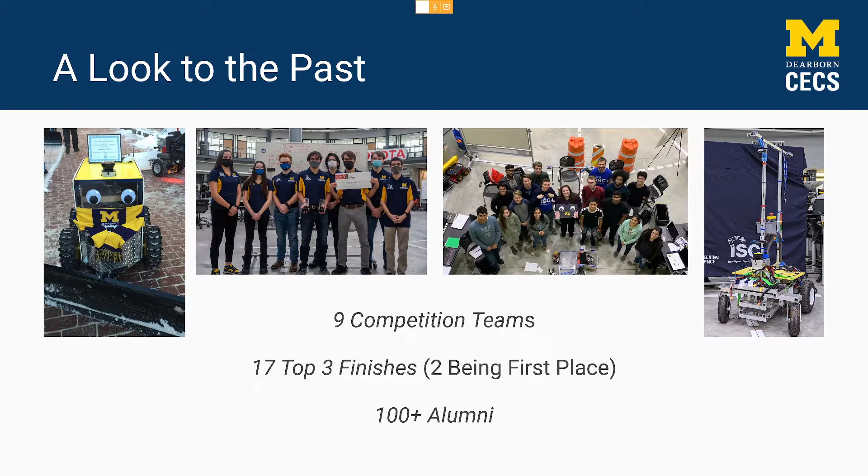First, I want to take a look into the past. One thing that's special about ISC, unlike other teams like formula teams and MASA that are based around a specific competition, is that ISC is more based around an idea - the idea of autonomous vehicles and learning how to control them and navigate various spaces. Since 2002, we have had 9 different competition teams across 4 different competitions, holding 17 top 3 finishes, 2 of which were first place finishes, and over 100 alumni who all came together with the same idea of working in the autonomous vehicle field.

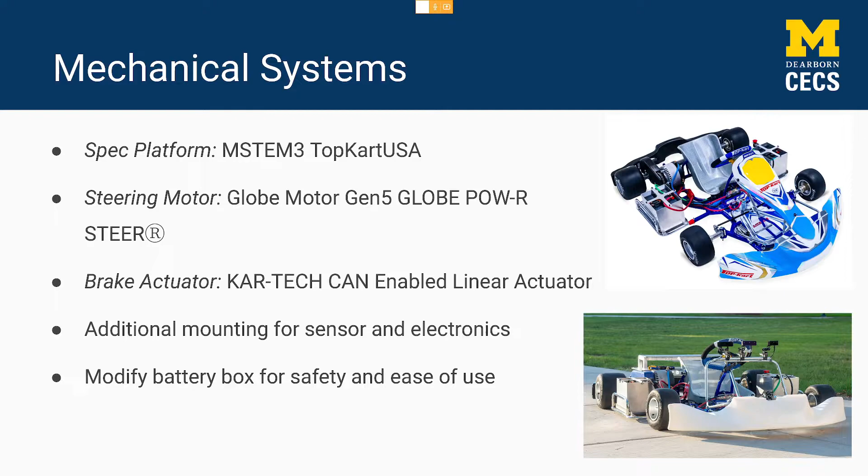Our steering motor is a Globe Motor Gen 5 Globe Power Steer EPAS motor. Our brake actuator is a KAR-TECH CAN-enabled linear actuator. I'll go into a bit about additional mounting for sensors and electronics, as well as some modifications to the battery box for safety and other things.

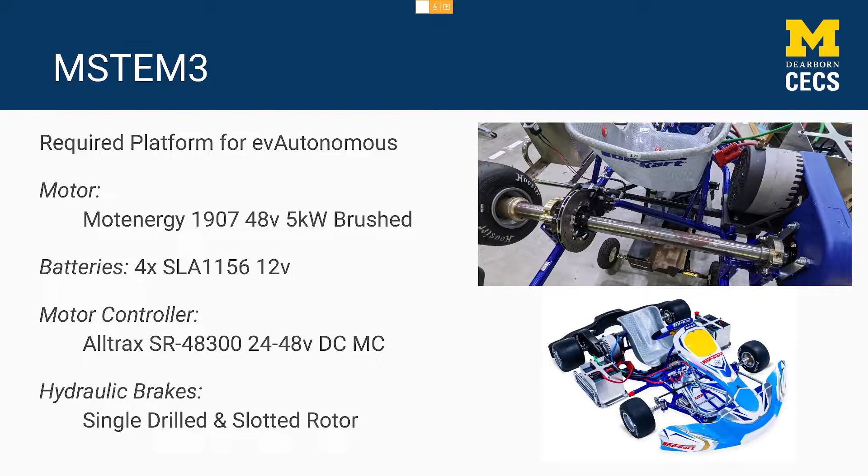So this is the spec cart. The motor is a Motenergy 1907, 48 volt 5 kilowatt brushed motor - all teams get the same. In the future, if we want to upgrade it, we may go to a brushless motor, because right now our cap is around 30 miles per hour for speed. For batteries, we have 4 lead acid 12 volt batteries. Our motor controller is an Alltrax 24 to 48 DC motor controller, and then we have hydraulic brakes.

Some data: it runs optimally from 9 to 16 volts at around 13.5 amps, 50 newton meters of torque, and runs around 525 degrees per second, meaning we could make a full turn without any weight in around a quarter second. It also runs at a 500,000 baud CAN rate.

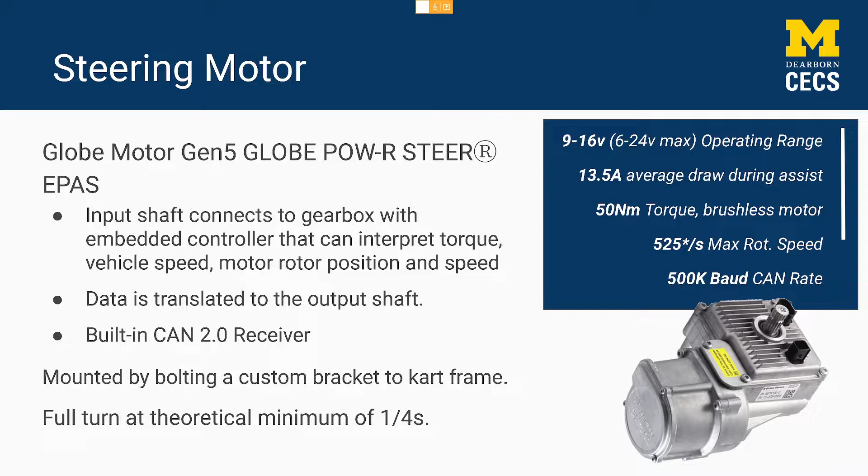For our brake actuator, it has a built-in microprocessor, and this will be mounted near the pivot point of our hydraulic brake arm to do electric braking, which will be trained by the AI. This operates around 250,000 baud rate, a bit lower, but will be controlled by the microcontroller connected to this. It operates from around 10 to 30 volts with 5.8 amps at max draw.

Its max extension is 3.1 inches, and at around 50 pounds load, it can extend around 1.77 inches per second. This means we can have fully locked brakes within around 3/4 of a second, which is pretty fast.

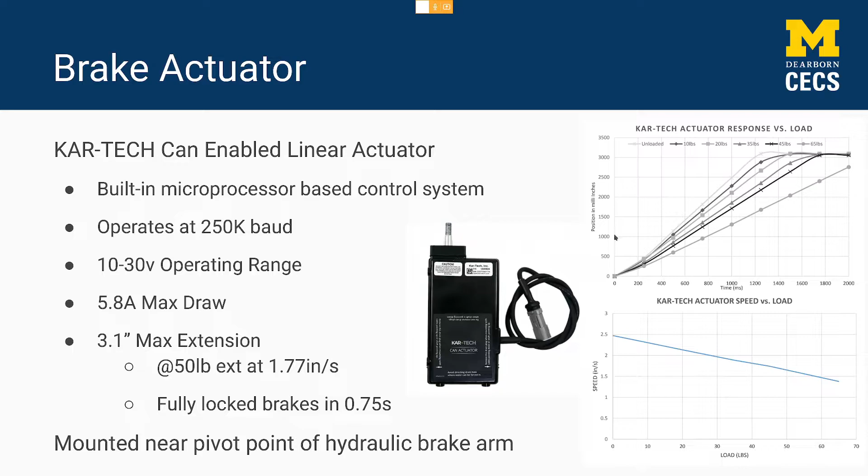Since electrical braking could have failure issues, we also have a mechanical band brake as a hardware-based braking system. This is controlled by an electromagnet, which gives us two options: we can either manually cut the power by using a circuit, or if the entire power circuit loses power, it'll automatically close the brake, which stops the car regardless of whether the computer is working or not.

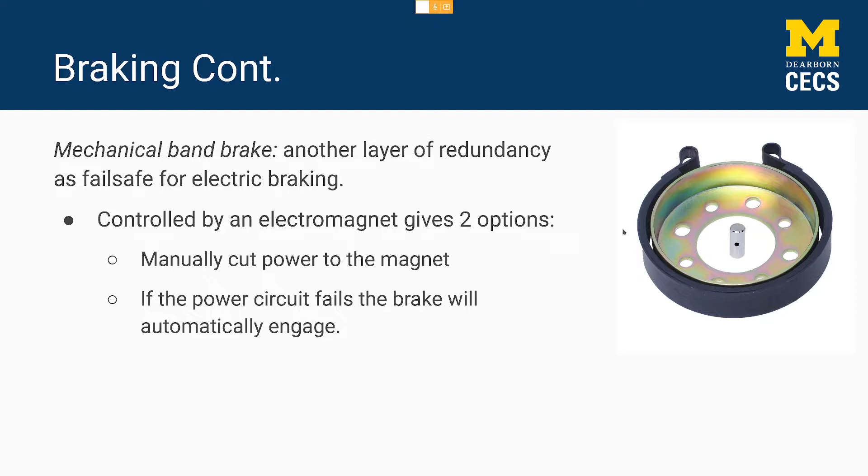For the lead acid battery box, the current ones that we have are not the best design, so we will be improving this. We will cover it first for water resistance, and they'll also be able to be bolted on and taken off, which reduces the weight for mobility of the car by a lot, because you have 4 22-pound batteries, which if those can be taken off, the car can be moved much easier.

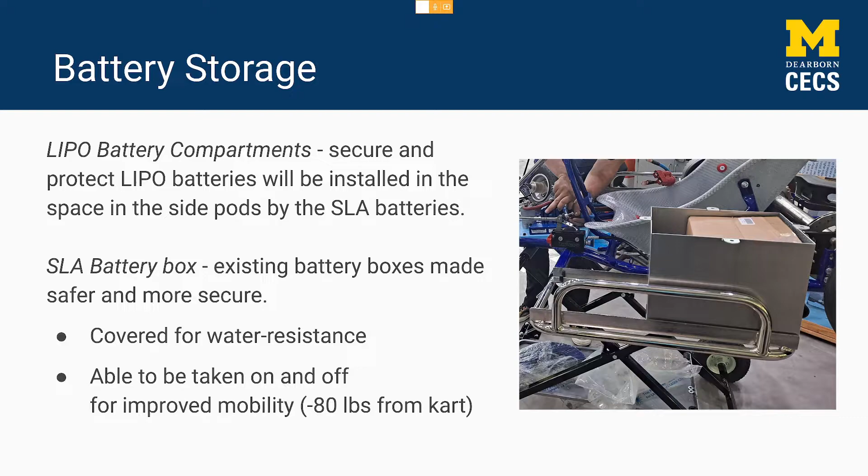We also have the InnoMaker Mini 360-degree LiDAR. This is what we will use as the perception for AEB. It will be mounted directly to the front of the cart, closest to where the impact will be. This has around a 12-meter range, so it can see a little bit farther out than the camera can. We will also be using wheel encoders for odometry as well.

So for the electrical systems on this vehicle, it'll be a combination of spec circuits that were given to us by TopKartUSA, which we are required to use for our powertrain, along with mid and low voltage circuits that will be designed by members here in ISC.

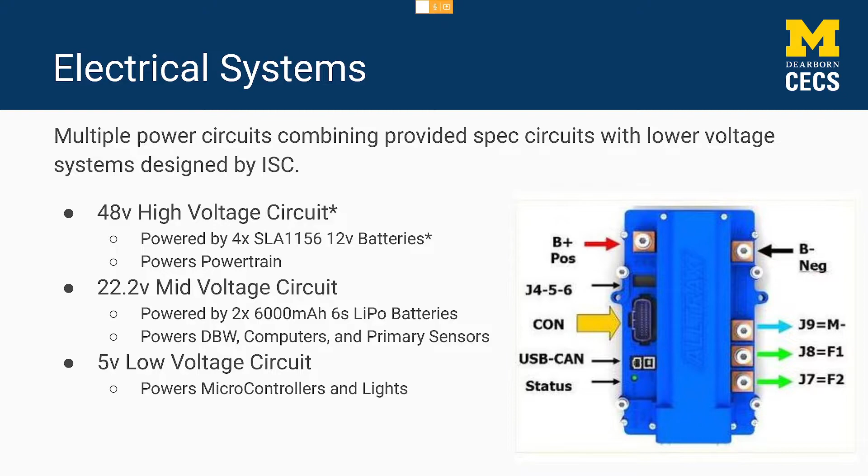The first one is our 48-volt high voltage circuit. This is the spec one provided by TinyKart. It is powered by 4 sealed lead acid 12-volt batteries that give us a total spec of 48 volts, 35 amp hours, and weigh about 80 pounds. This circuit is primarily made of 2-gauge multi-strand wire that's able to comfortably carry the 52-volt, 120 amp max load that could be on these wires. This includes our motor controller and our e-stop systems. Most components will be on this power circuit because it is what is driving the motors.

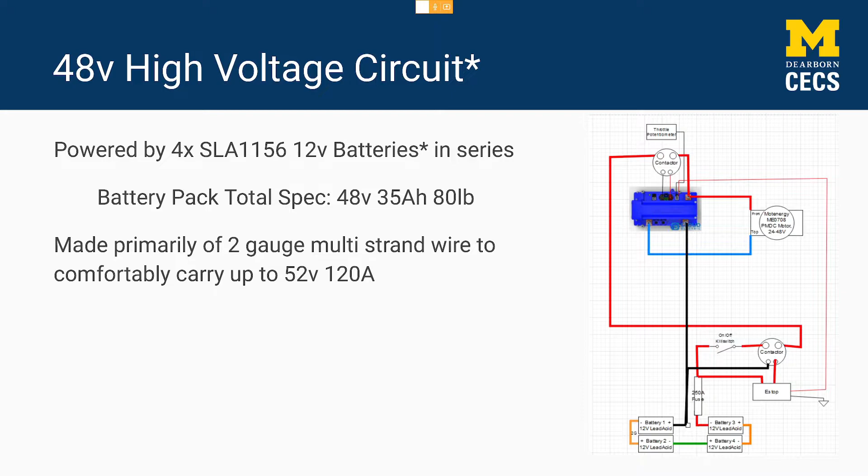Our second, the mid-voltage system, is going to be powered by 3 22.2 volt, 6000 milliamp hour 6S LiPo batteries that are all in parallel, giving us a total battery pack value of 22.2 volts and 12 amp hours at 3.6 pounds. You can see some rough estimations we made for our power consumption that led us to this battery type.

One of the things with our system is that if we need to add and remove objects from this circuit, or if we need to replace them -- let's say we got a new steering motor or brake actuator -- we can easily manipulate what batteries are in this circuit based on what is required for our circuit.

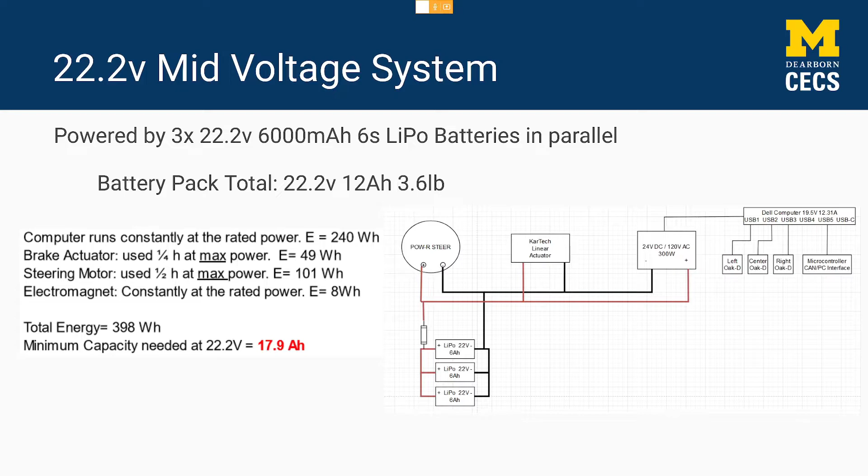And then as for the boards, all of our boards are going to be powered by a separate 5-volt low voltage system. For our main interface, we're using an STM32 Nucleo board that, unlike the Teensy, actually has a built-in DAC and onboard Ethernet, and has 3.3 to 5 volt power supply pins. And then for our main CAN bus nodes, we'll be using Teensy 4.1 Cortex processors.

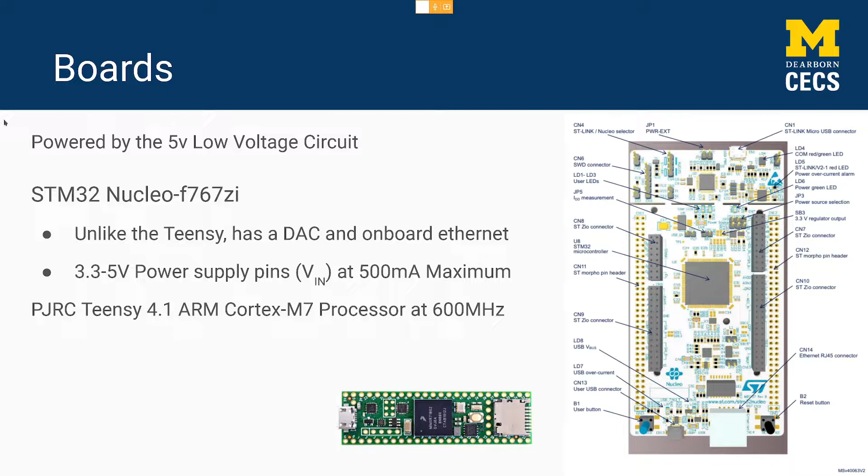So the software this year is going to be quite different looking than previous years of ISC, simply because we've changed competitions, and so the context has changed quite a bit. The biggest thing you're going to notice, at a very high level, is that we aren't going to be using the traditional nav stack anymore, at least for this year's implementation.

Instead, we're actually just going to be abstracting all of that with an end-to-end behavior cloning neural network. So that'll be our primary form of control instead of the classic approach of LiDAR scans, building a map, and planning on that map, which we've used for previous competitions, largely just because of the competition itself. I'll get into that more later.

At a high level, you can see we actually have pretty few inputs in general. Mainly when we're actually running the system, the only input that's going to be used for control is simply the camera. That's because ahead of time, we're going to need to train the neural network using the hardware portion, the drive-by wire and brake-by wire systems, which will be able to encode those values. And then the AEB is just going to take steering encoder and the little LiDAR, which we have dubbed the baby LiDAR, into it.

But again, at a high level, we only have two forms of control for Phoenix, that being the neural network and the automatic emergency braking system, both of which we'll get into as we go further. Another thing that you'll see shortly is that a lot of our software this year is actually going to be embedded, not necessarily in ROS, as is pretty usual for our projects.

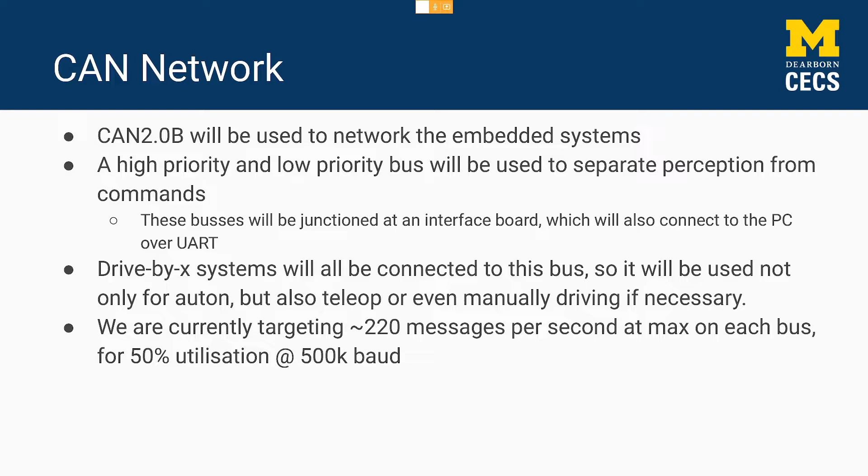So the headlining feature of the software, as I mentioned before, is the end-to-end behavior cloning. Essentially, the idea here is to have someone drive the cart, collect their data, and then have the cart drive as if they were driving it—essentially cloning their behavior. So it's kind of in the name.

The goal of the system isn't to replace a traditional navigation stack for general obstacle avoidance, because that isn't as big of a focus this year since we're in a time trial format. So this year's competition, being on an open track, is more of a control-oriented competition.

Which is why this makes more sense for what we're doing. To implement this, we've partnered with a lab here at U of M Dearborn, BIMI, led by Dr. Jaerock Kwon. We're going to help integrate their end-to-end platform onto our platform, doing things like porting it from ROS 1 to ROS 2, since it's still in ROS 1.

We're going to need to make a simulation environment, since we'll need to essentially emulate the track. We'll also be generally assisting with testing, data collection, and the normal machine learning techniques, which will be really nice to give our team some more exposure to those as well.

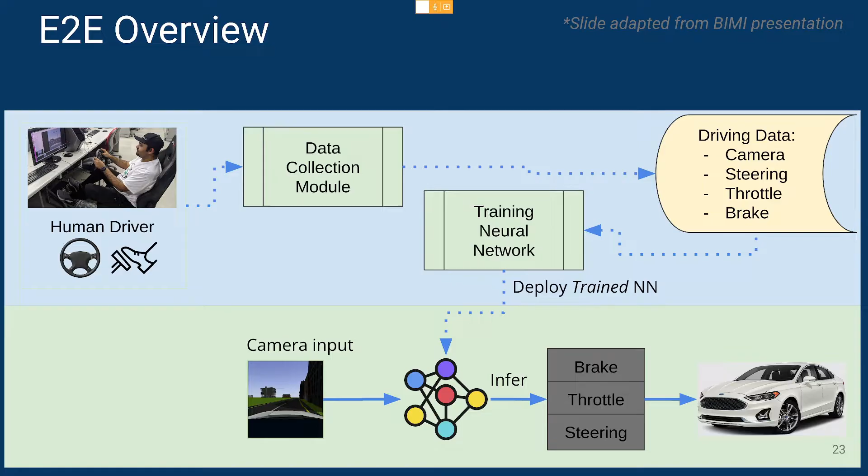For the training, we're using a method BIMI has been researching. Instead of simply collecting an enormous amount of data with the cart to train it, we'll generate our own simulated data. The idea is we'll run the cart, get that labeled data, generate an initial model that's good enough, and then deploy that model to sim.

In sim, it'll do essentially what we did in real life, in that simulated environment, taking the outputs of the model and having it roll around sim, collecting new data, labeling that data, then we'll manually trim out the parts that are bad—say it randomly swerves right when it's supposed to go left. If we trim that out, we retrain the model, then repeat this loop.

Theoretically, we'll be able to filter out a lot of the bad behaviors, given we had a reasonable model to start with. This should let us train the cart without constantly gathering new data, which is very important since we can't just roll this around like a snowplow in a parking lot—we need a track. It'll be a lot harder for us to just go out and test the cart this year, so it's important that we're able to train this more efficiently.

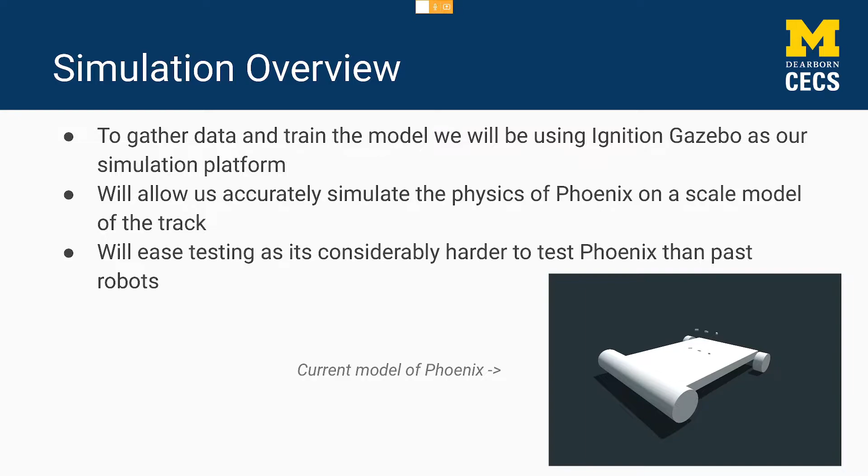As was just mentioned, we need a simulation environment to be able to have the model train itself. So we'll be utilizing Ignition Gazebo to achieve this. It's proven well for us in the past with Ohm, so we're going back to it to simulate the actual physical dynamics of Phoenix, which will ease testing since it's considerably harder otherwise. As Andy mentioned, we can't just roll it out in the parking lot because that's not the same environment. It'll be competing on a go-kart track, compared to things like Ohm or Yeti, which competed in environments similar enough to what we have access to here.

New this year is track generation. We're using a plugin called Blender GIS, which allows us to grab satellite data of a region and create an elevation-accurate model of an area. We can use this to get an actual one-to-one scale replica of the track we'll be competing on, so the AI can train itself on the actual competition course. This helps us for several reasons, like being able to train around things like pit road.

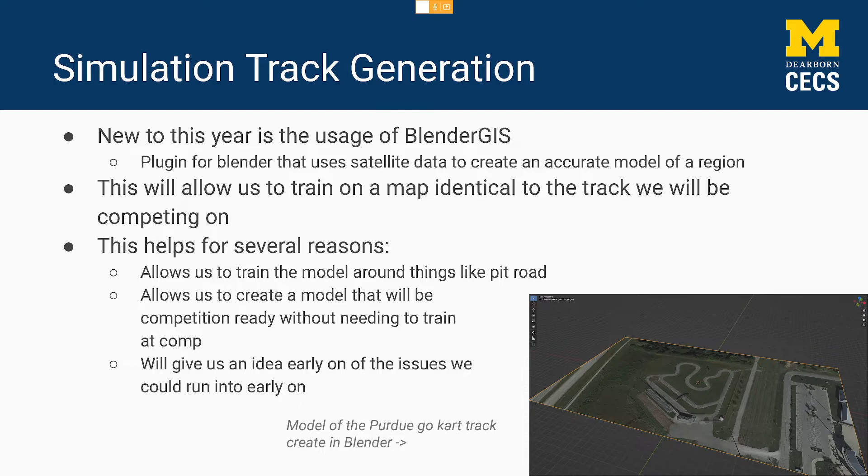What do you do when you approach pit road? Do you go down the pit or continue on the track? We'll be able to create a model that's competition ready, and it'll give us an idea early on of any issues we'll run into at competition, potentially with the track, like if it takes one corner really badly consistently, things like that.

Something you may have noticed is that our end-to-end model is essentially going to be like a lane keep, in that it's just trying to stay on the track. We aren't going to specifically tailor it to obstacle avoidance, which leads to an issue: even though it isn't necessarily in our competition domain for something to jump onto the track, we still want the cart to stop if there's something on the track, or in general if the AI doesn't do what we think it will, because that's one of the issues with machine learning—there are edge cases, and it's very hard to test for every individual image it could ever see.

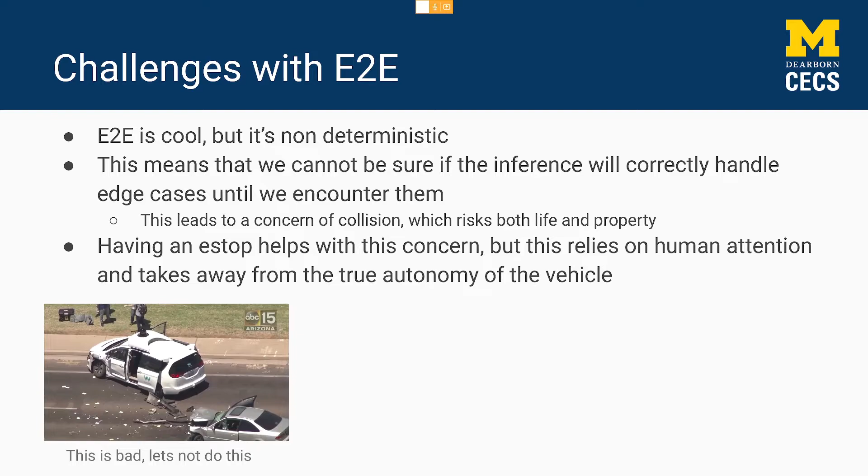So what we want is for the cart to preferably stop itself before it hits something. We do have the e-stop that will always be there, but relying purely on this takes away from the autonomy of the vehicle. It's also not always practical—sometimes you don't have time to react to the cart suddenly swerving. As such, we are developing an automatic emergency braking system to mitigate these concerns.

This is something you see in actual vehicles, which I find interesting, because we're essentially behavior cloning a human, yet we've also cloned some of the problems of humans, so it makes sense to copy some of the solutions as well. The idea of the system is: if the cart is heading towards something such that it'll collide within a time period we aren't comfortable with—we'll probably define this empirically using stopping distances—we'll e-stop the cart. That band brake from earlier will come into action, and the cart will stop, hopefully without damaging anything or anyone.

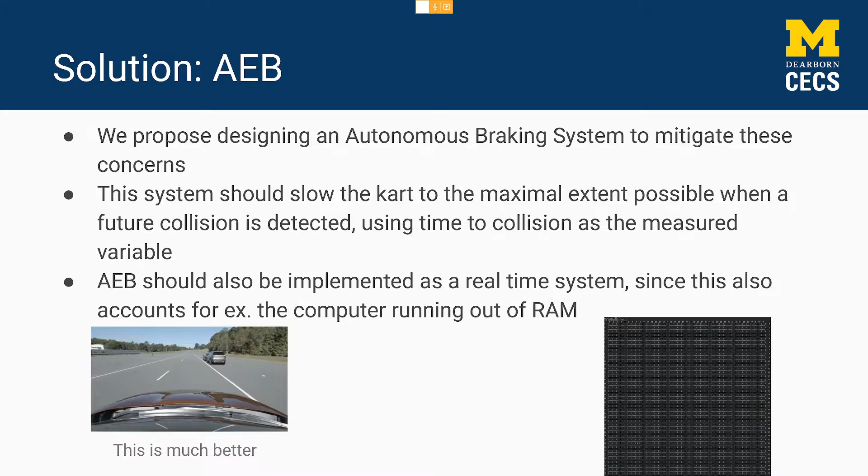We won't be implementing this in ROS—it'll be on a real-time system, since ROS isn't real-time. So for example, if it runs out of RAM, or there's a GPU issue, something like that, we won't just blindly keep moving across the track. If we swerve into something, we should stop automatically, which should help improve safety dramatically.

So this is very briefly an overview of the current iteration of the algorithm we're choosing to use. This has gone through a few design revisions, and I'm sure it will go through more. But essentially, the idea right now is taking a 2D LiDAR rather than a radar, which you'd find in some production cars. We take the 2D LiDAR, essentially take the points we get out of it, and fill a grid where each grid square says whether there's something like an obstacle there or not.

We'll then be predicting, given the current cart's parameters, the trajectory of where that cart will go, essentially like an arc. Then we'll iterate over certain time steps on that arc, and for each of those time steps, we'll find a collision box around the cart, basically just making a big box around it, then fill in the grid squares that box is overlaying.

If any of those grid squares are already filled by an obstacle, then we know that would be a collision. We complete this process until, since we're essentially integrating over a physics function with time, we hit our maximum time to collision value. If we have any overlapping squares, we know that's a collision, we e-stop, and collision is avoided.

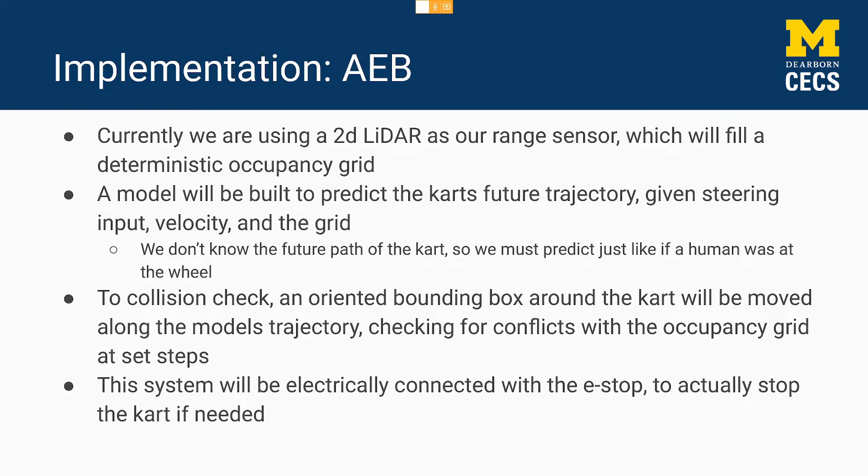So even with this current form, there are some design considerations we're still working through. One, we're currently relying only on one sensor, the little LiDAR. We'll have to see how noisy this is in the real-world environment. It may be worth looking into sensor fusion with perhaps a different sensor than another laser that could help through some of that error. That's something we'll have to see.

Second, the motion model right now, since we aren't given a path from end to end, as I mentioned earlier, this is essentially like there's an individual behind the wheel, and in fact this AEB could be run with an individual behind the wheel. So we aren't able to know the exact path the cart's going to take, so we have to predict that. Currently we're holding a lot of things constant, essentially everything, including velocity.

So we'll have to see, this may be too restrictive to be realistic in the real world. We might get a lot of false positives. So something we could do is attempt to use more classical machine learning to derive those paths. I do wonder if that is advised for a safety system though. That's just something we're currently working on.

If you have worked with this, I would be curious to see your thoughts or suggestions on this, since ultimately we're here to learn. I'm curious to see how this would be approached in a way that I haven't at the moment.

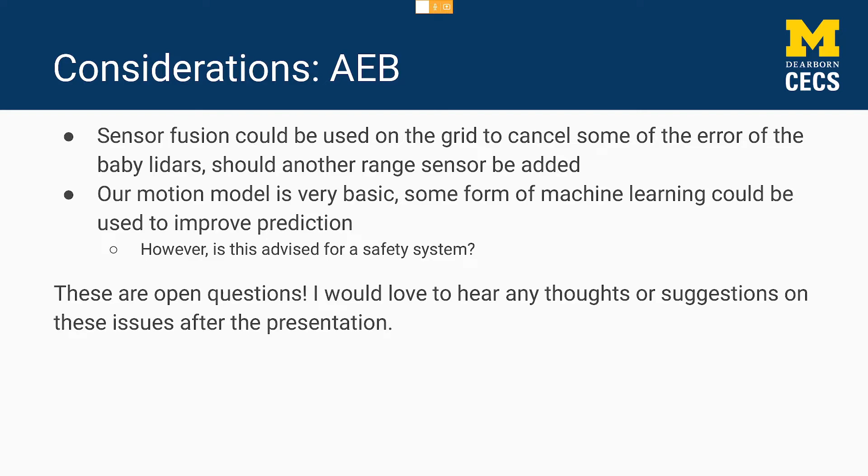Going off of what Andy was talking about with safety, obviously safety is incredibly critical on a fast-moving platform like this. This go-kart's going to be weighing around 200 pounds and moving 15 to 20 miles an hour is our current target. So in that case, F does really equal MA. If it were to hit something, it would be rough.

So we need to ensure that all of our embedded subsystems are very safe, especially considering that with our current training method of having someone drive the cart physically and collect data, that means we're going to have to abstract a lot of things, especially the braking system, from the actual hydraulics themselves.

So the user of the cart will be controlling a pedal that will be sending data to an ECU that will be controlling the hydraulic system, and will not currently have direct control over the hydraulics, which, as I'm sure you can all see, has a few potential issues.

So we have a couple things we want to do to ensure this will be safe. We're going to have both onboard and wireless e-stops, like all of our other bots, that will fire the band brake, as was talked about previously.

If the PC to CAN interface board crashes, for example, during autonomous operation, you would lose all control. So we're going to set up a way so that if that does crash, it's going to immediately fire the e-stop, stopping the car. AEB, as Andy mentioned, will also stop the cart under e-stop if it deems it necessary.

And should any other board fail and the operator is unable to react at the time if they are manually driving the cart, AEB should be able to ensure that they won't suffer any kind of collision.

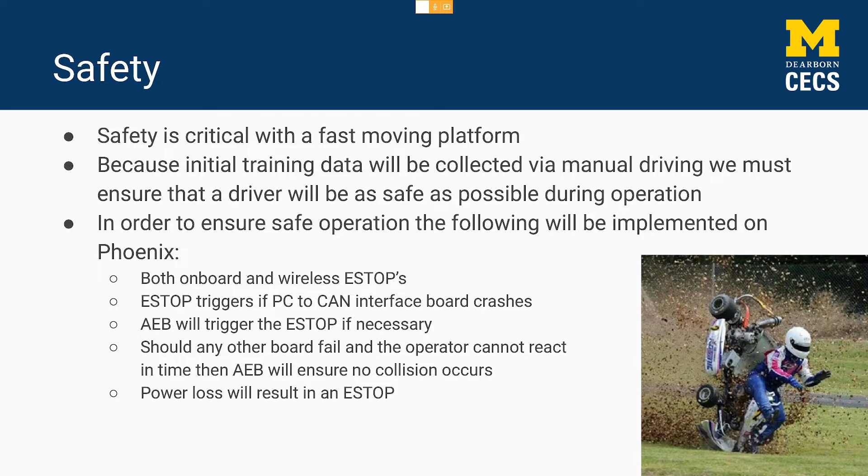And then finally, power loss will result in an e-stop because the electromagnetic band brake will be held open under power. So should the entire system run out of power, battery goes bad or something, it will result in the car immediately stopping. So these are just a couple different things we're going to implement, as well as some more as we continue to look at potential safety issues, to ensure that we don't end up like our friend in the corner right here going into a ditch. So yeah, with that.

On top of that, we have a whole new suite of administrative tools, thanks to BAM. Hi, BAM. With two big things being a new BOM system. Basically, what this allows me to do is input things that we've purchased, how much they cost, how much was shipping, and then track how long it actually took for the goods to get in.

We're also comparing delivery times for different suppliers to see if there's one that's more reliable. Let's say we were in a crunch and really need a part sooner — who's more likely to actually deliver in a shorter period of time, people like McMaster-Carr versus Grainger versus Amazon and so on. This also auto-populates out into subcategories, allowing us to track how electrical is doing on budget, how mechanical is doing on budget, how the sensors are doing on budget.

And how much do we have left to spend. So let's say we break one of our sensors — do I have the budget left in my sensor budget from the pitch session to purchase new sensors, or do I have to go looking elsewhere? Maybe we need to cut and get cheaper batteries, stuff like that.

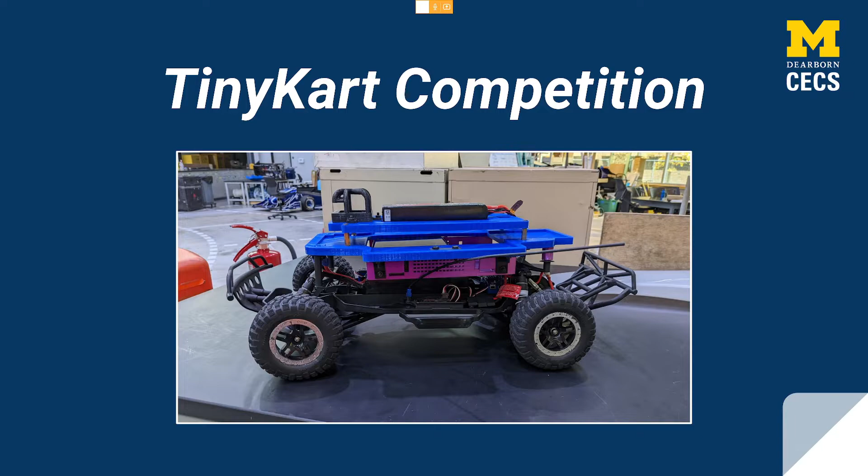Why do I have to double click? That's so sad. So what is TinyKart?

TinyKart is a small team-based learning program for Project Phoenix with an internal competition around April 2023. New members of the team will be broken into sub-teams that will do small-scale autonomous vehicle design and development over ideally one semester, creating a more accessible platform to allow members to develop and test basic mechanical, electrical, and software skills on a lot lower risk platform.

Currently, our vehicle looks like it'll cost us about $25,000 to $30,000. Each one of our TinyKarts, including the onboard computers and sensors, should be just under $1,000, which is a lot more affordable for people to work on. We also took inspiration from F1/10 and Donkey Car.

A little bit more into the hardware of TinyKart. The platform we will be using is a brushed two-wheel drive Traxxas Slash, which you can see here. Obviously this is already built, so the mechanical side is pretty simple. Mechanical members will mostly just be designing a chassis to hold all of the components. The electrical teams will design a safety circuit, integrate a computation source, whether that's a microcomputer like you can see on this cart, or embedded microcontrollers. They'll also include sensors, and a power circuit to power both the cart and the computation source, as well as microcontrollers.

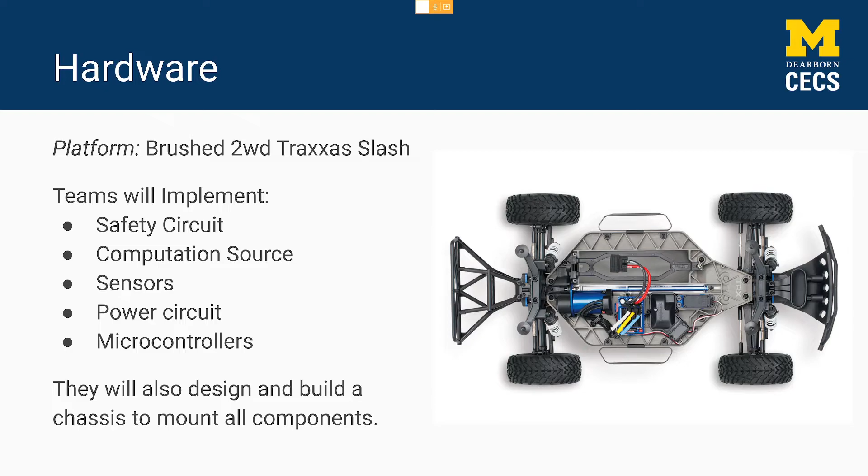A little bit more on the software. The current build of TinyKart Software - I'd preferably rather there wasn't a TinyKart Software, I'd prefer this to be more of a DIY kind of competition, but right now there's this kind of vanilla TinyKart software package, which I built off of KiloOhm, which is built off of the last Yeti. This is very similar to what ISC has been doing for quite a few years now.

It's basically just running a pretty standard ROS2 Galactic Nav2 stack, using A-Star as its global planner, DWB as its local control planner, and Slam Toolbox for SLAM. We're doing some sensor fusion with IMU, using the Ignition Gazebo simulator. It's very similar to our past projects - essentially it should just be almost like TurtleBot. You look at it, this is a decent way to do it. It certainly has its flaws, but it does work.

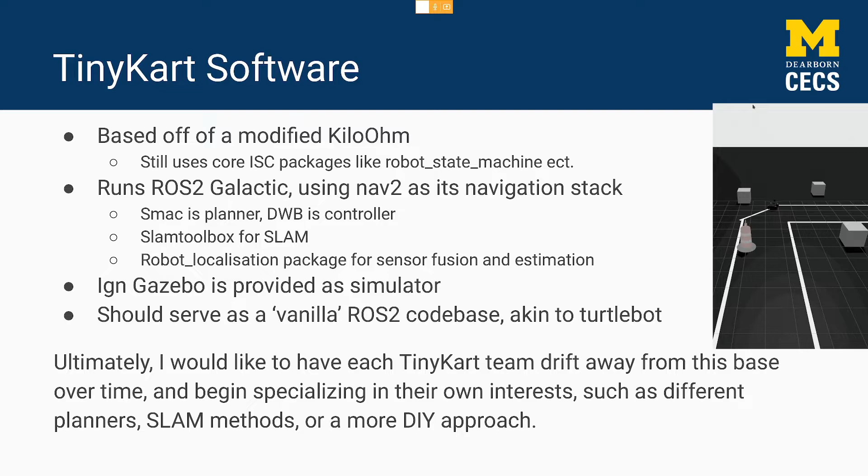Ultimately though, I'd really like each TinyKart team to preferably quickly drift away from this base to explore robotics a little - so something like everything from changing one of the planners, to changing the entire SLAM, to completely redoing portions, to even abandoning ROS entirely if they want. That's kind of the philosophy I'd like to take towards TinyKart - it's for learning. There is a competition, but ultimately it should be about exploration first more than anything.

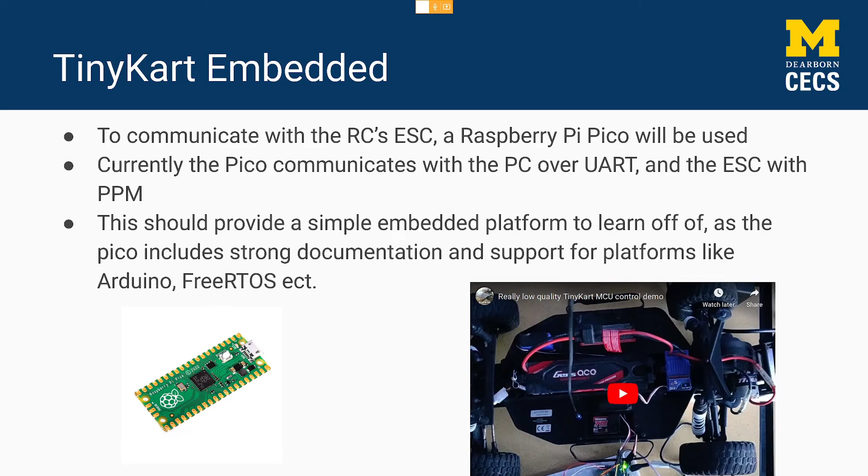And that continues with the embedded stuff, because we need an embedded controller to connect to the ESC on the cart, and right now that's all it does. You could of course add other things, even just RGB or something. Right now we're using little Raspberry Pi Picos. I think these are pretty great for this purpose because, one, they're really cheap, but two, they have a ton of software libraries and a ton of documentation for those - everything from its built-in library, but also Arduino. It even has a FreeRTOS port. You can do a lot with these little things, and that should provide a strong jumping-off point for people getting into embedded development, just as much as autonomous vehicles or hopefully electrical as well.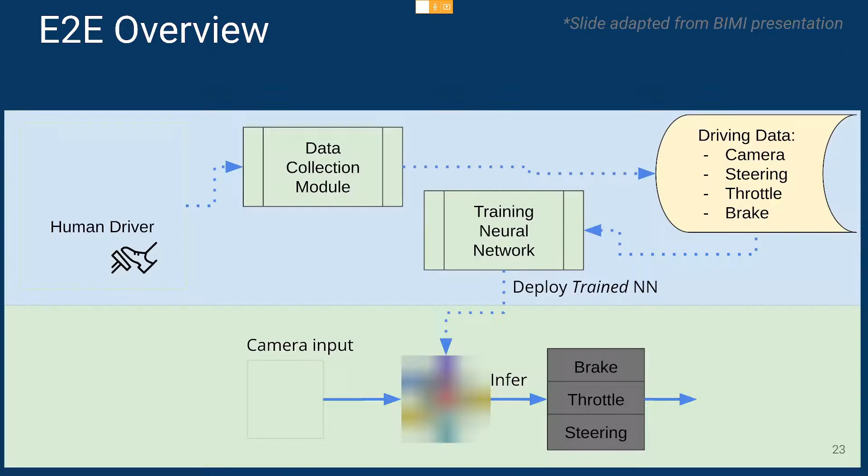So you didn't want me to put slide comments, I see. One thing I was going to ask is, on your low level software diagrams, you talk about different control units, vehicle control units and so on, but what sort of actual hardware design has been made for any of them? It seems like the only time they were mentioned as separate units was in this slide. What kind of schematic or hardware design has been made, and how do you plan on putting the individual ECUs, VCUs, and all that stuff together?

At the moment, each of the ECUs is just a single microcontroller with a CAN transceiver to communicate onto the bus - that's essentially what all of them are. The only thing really of note is the interface board, which will have a switch that allows, if a human driver is going to collect data, to switch it so it'll actually start doing the actual collection instead of attempting to send control messages, as well as the e-stop connectivity of the interface board.

This is something I didn't talk about a lot on this slide because I was trying to keep pace, but each of the brake and throttle ECUs are going to have the stock 0 to 5 kilo ohm throttle pedal. The throttle pedal on the go-kart is just a 0 to 5 kilo ohm potentiometer, so we're going to use two of those to get values for throttle position from each of the throttle and brake pedal. The glow bar power steer unit does that internally, so we don't have to do anything there.

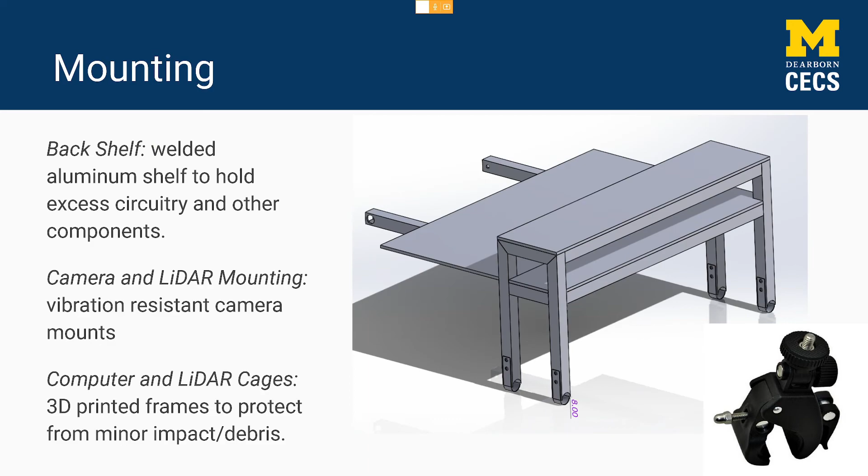And I guess one other thing is, where do you - it seems like there's just a little dedicated platform for all the electronics, from at least the one thing I saw on the one slide. Yeah, just that little section there.

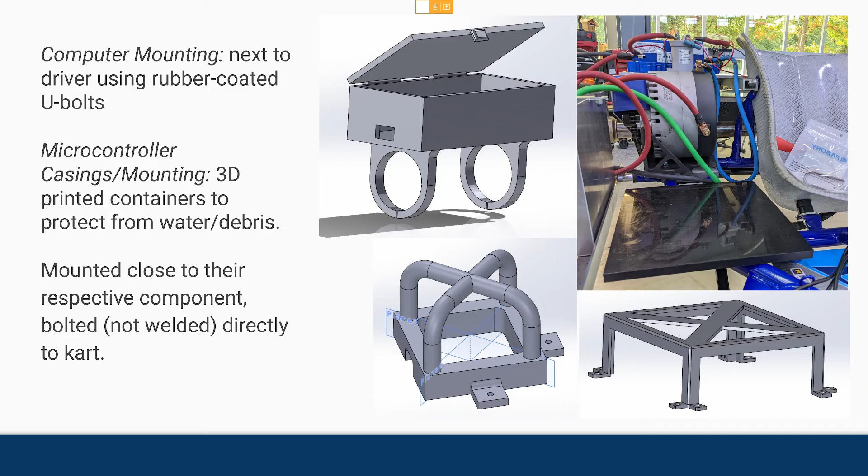I'm still new in the automotive electronic industry myself, but from what I understand, part of the reason why a lot of the different things are separated into different logical units is because they have to be separated into different parts of the car, and there's a lot of stuff for each of them. But for some of the low level stuff like this, I wonder if you might be able to combine one or two of those together. It seems a little illogical having 4 different microcontrollers running basically 2 inches from each other, even if they are doing different things. Yeah, that's true.

We could definitely condense this down a little more. We just wanted to, partially, some of this stuff like the brake actuator and the glow bar power steering happen separate, but we're also keeping all of our eggs out of one basket, so to speak. So if one of these does fail, it only kills like 1 or 2 functions, ideally. So that was sort of the design.

We can definitely go back and see if we can merge a couple of these together, because it would improve things. I know if you plan on using that Nucleo 144 board, you have a million pins. I'm not saying you have to put everything on that, you can still have your separate ones, but I would hate to see you spend $30 on the nice big microcontroller dev kit, and you only use just the DAC output from it.

That's true, yeah, and that's also fair. Another thing I want to mention is, are you sure the motor controller requires a DAC output, or if it can work with a PWM output where it averages to get that output? Because that's what happens a lot of time in software. Basically, it will have like a 50% duty cycle, but it will read it as if it's like 2.5 volts versus 5.

You would have to double check the settings on the ESC itself. At the moment we know that it can take 0 to 5 volts. There are a number of other throttle control settings on it though, so I'm pretty sure it can take PWM in, so we could look at that as well.